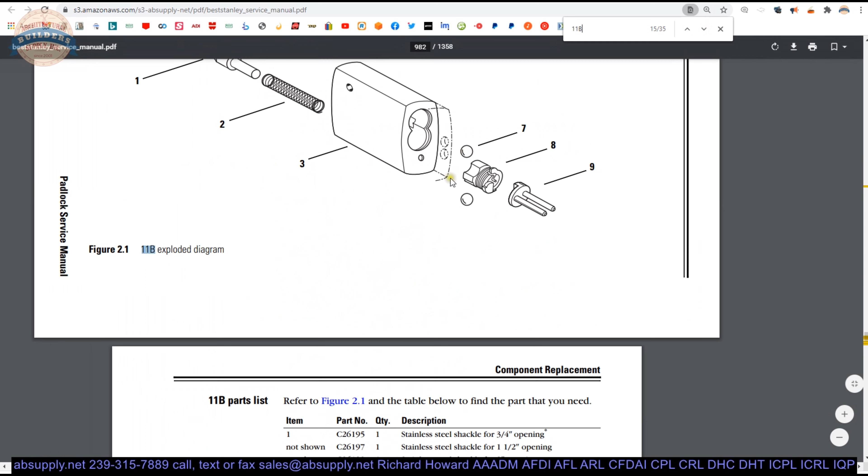Let's look for 11B and see what we come up with there. 11B padlock, okay, 11B exploded diagram. So let's continue to cycle through these matches. Here we go. All right, so that's what our 11B padlock looks like.

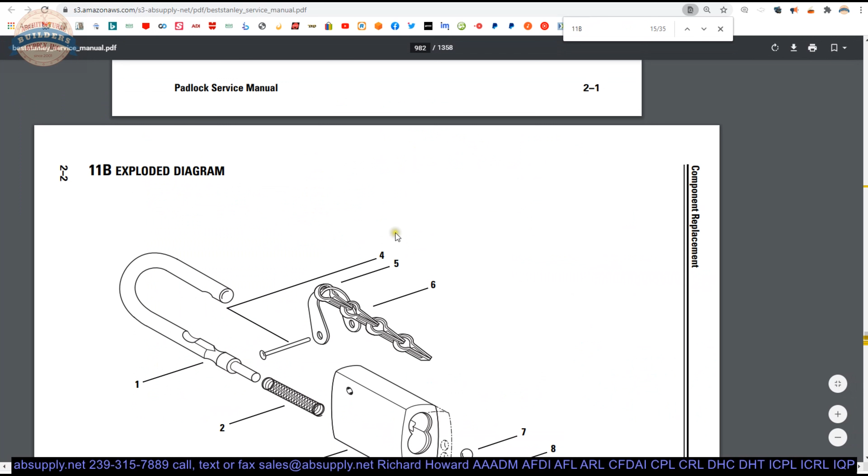Now, why is it an 11B? Well, the part number is 11B, so this is clearly a subcomponent of the 11B padlock. And here's our exploded diagram. So part number 1 is indeed our shackle.

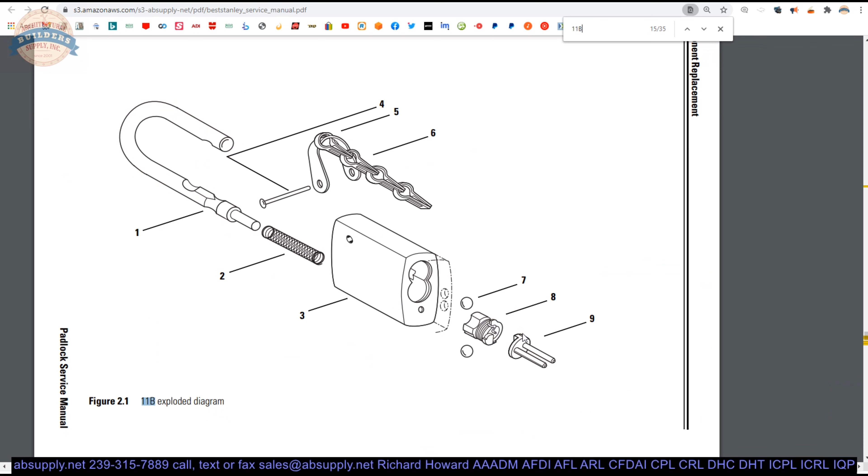A very simple mechanism - I've taken these apart, they work very well, they're easy. If you're going to service this material, you do need a tool for part number 8. And that part 8 is the locking cam assembly, and that tool is listed here somewhere.

Yeah, here it is, part 3, locking cam disassembly tool. There's a spring involved, and without the tool, it can be a challenge to get that to move - that's to be sure.

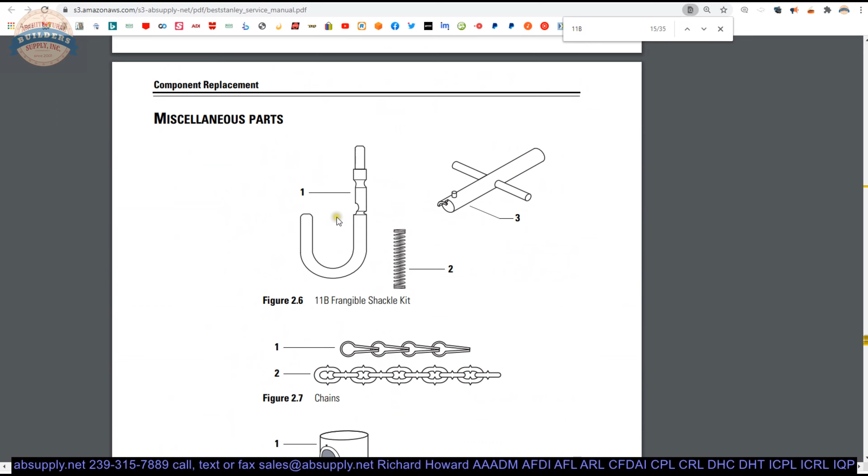Miscellaneous parts, part number 1, shackle. So they do make a frangible shackle kit. But if we get back up to our 11B padlock, part 1 - stainless steel shackle for 3/4 inch opening. Now they get down to, in part 1, frangible shackle for 1.5 inch opening. So that's clearly what we're dealing with here.

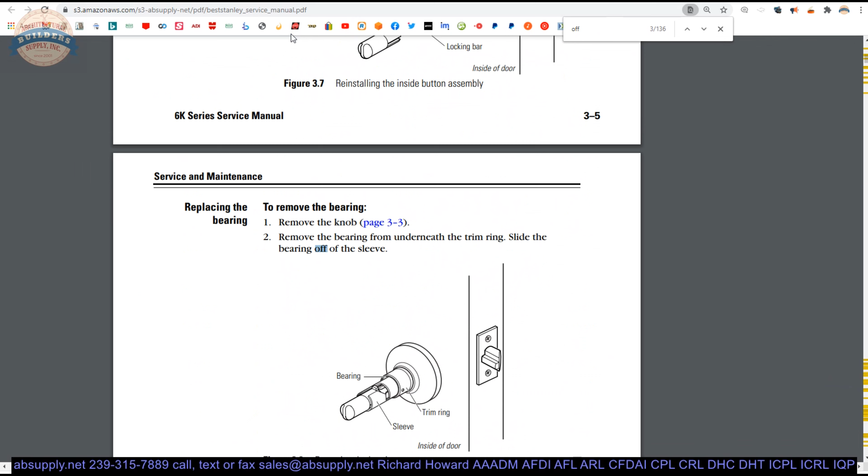Just searching through the document... okay, I don't know where they're coming up with that part number from, 11B2. We'll see if we can discover where that part comes from.

The point is, in the service manual, you're able to pull up these different series. If you have an 11B padlock, here are the components available. Scroll to the next page and there's the parts drawing. Once on this page, you can review all the other replacement parts for the different padlocks from Best, their different series.

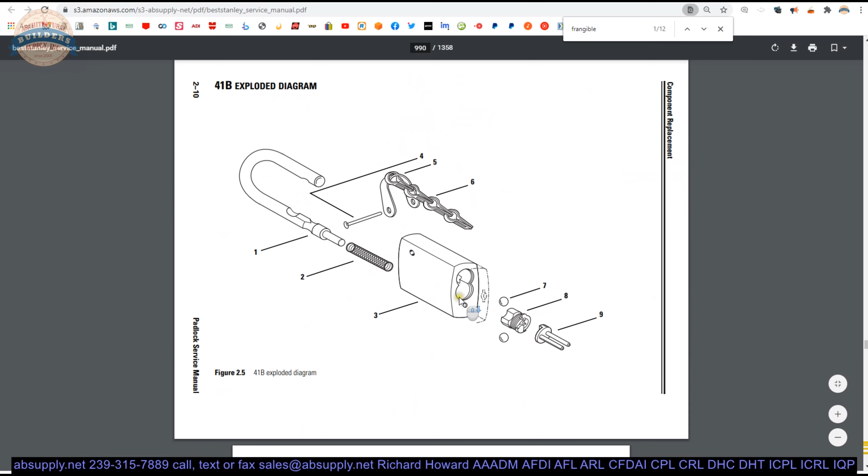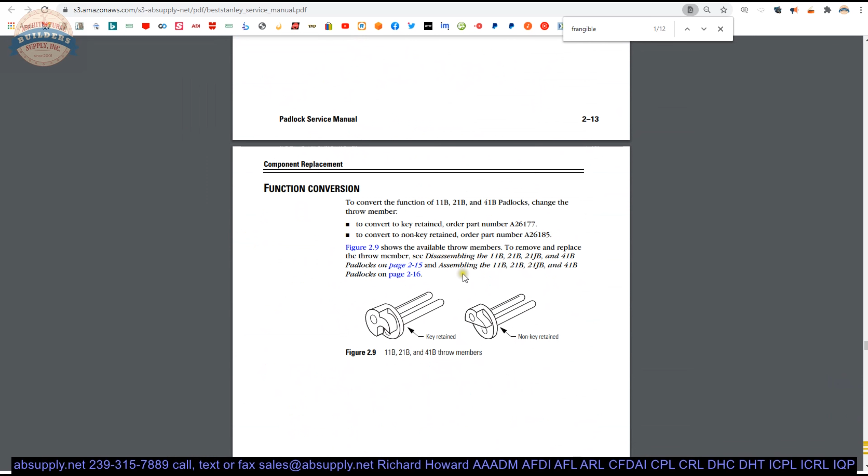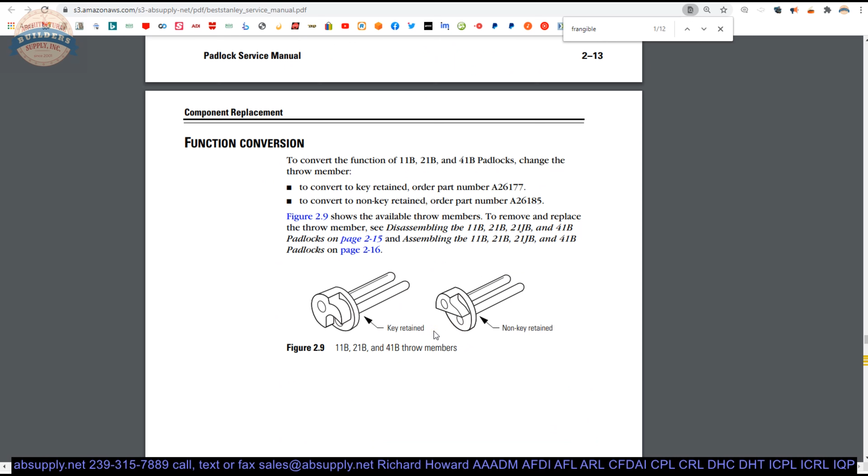Throw members - not uncommon to purchase these. The reason you'd purchase different throw members for padlocks is because the padlock you have will be non-key retaining, meaning you can remove the key when the padlock is either locked or unlocked. However, that might not serve the application best, and you want to be sure to remove the key only when the padlock has been relocked. Key retained throw member is what you would order in that case.

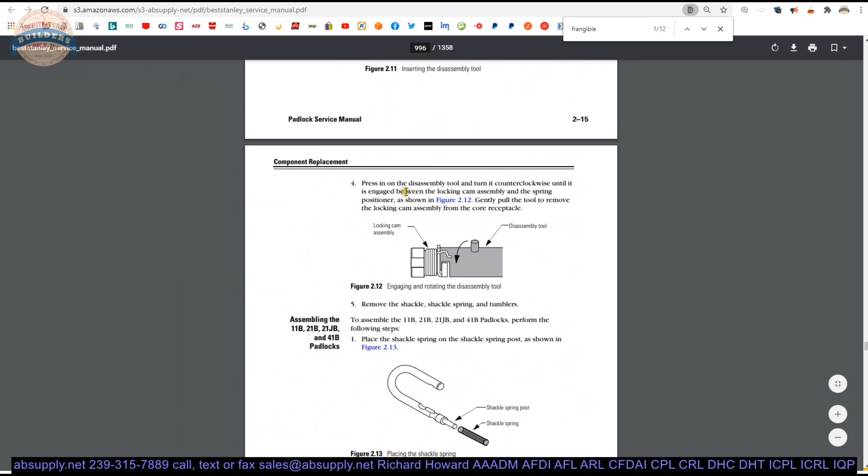Instructions on how to service the material are in this area as well, showing how the disassembly tool is used. I have gone through this when servicing the material. It takes a little getting used to in terms of working the disassembly tool, but as you can see from the exploded drawing, there's just not a lot of parts here.

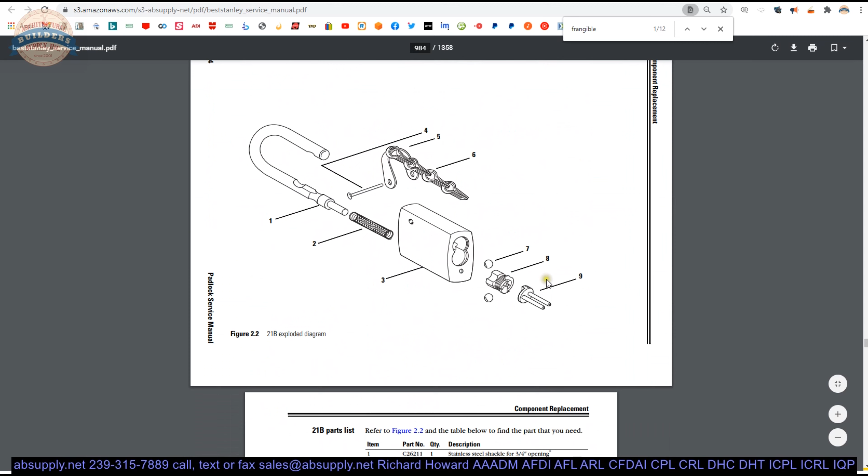That tool only works with removing and inserting your locking cam assembly. Now, still a mystery, this 11B2OFF.

What it sometimes boils down to is looking at the price list. Let's first look at the full product catalog, which is here. We'll do a find function on our keyboard for 11B2OFF - that doesn't give us anything either. Okay, it does, because I'm searching for the wrong term. It's 0FF, I can see that clearly now.

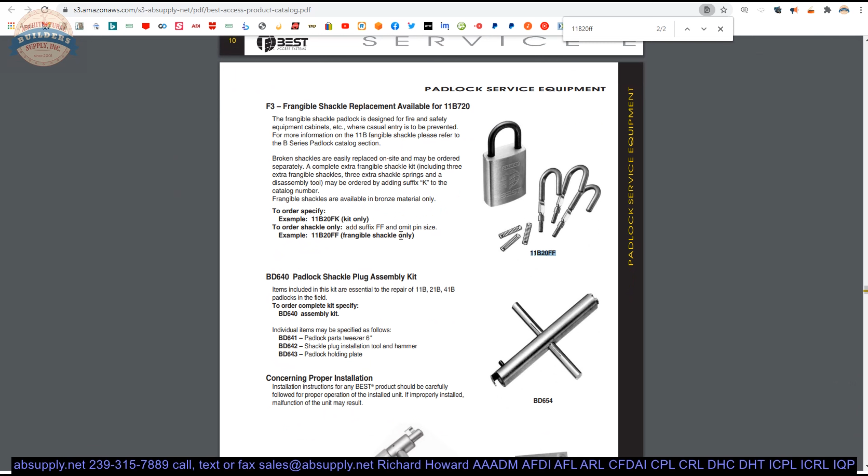This document is also linked down below. So it's 11B20FF - we're going to need to correct that character in our part number. However, the issue is that it's clearly a 0 in the cut sheet, but in the price list we've pulled up, it's clearly an O. So it's hard to say which it is. We'll leave it at O, since the price list, in my opinion, generally supersedes other published data.

It should be 2.0 in my opinion, because it's a reference to the size of the padlock, the shackle height. The shackle height we have is 1.5 inches, so it'd be a 2.0. So that's what that's going to be - it'd be an 11B20FF, and there's your frangible shackle only, shown here as well in the cut sheet.

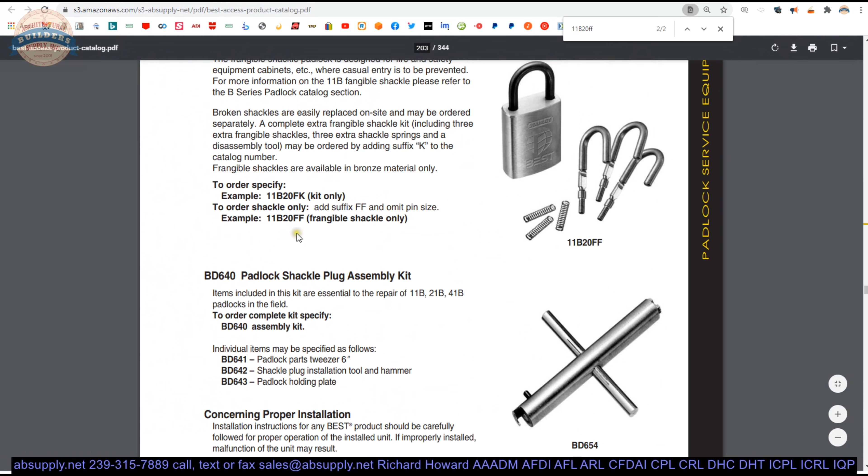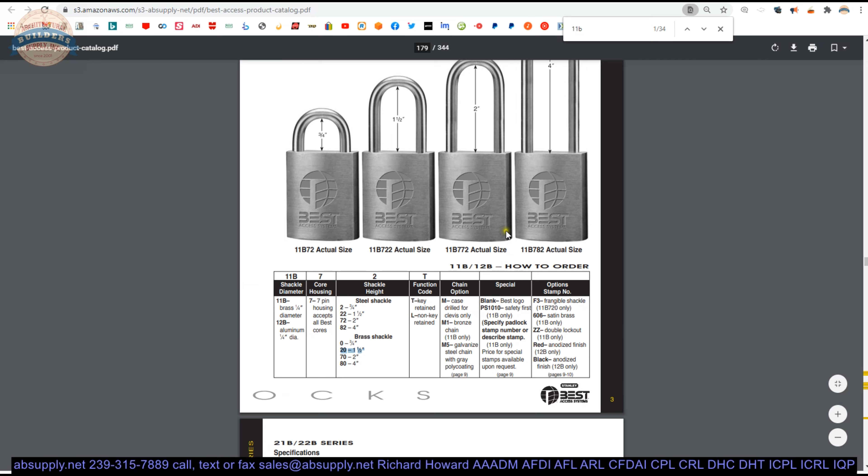Let's see if we can just find the padlock itself, which we can. We can pull up in the full-line catalog a linked product brochure down below, where you can scroll through and view all the padlocks available. Our 11B means it's a brass body - they do make aluminum as well - 7, and then your brass shackle, 20, because that's what we have here, a 20. Then whatever other parts of the part number you need to further detail your padlock requirements. The product brochure lets you simply look at all the padlock information from the manufacturer.

Back to our F3 option, frangible shackle kit. Now, on the manufacturer's page is where we keep all the encyclopedic documents - not just the service manual, but also the Best core and key service manual. I have a catalog on their E-Series mortise and rim cylinders, since it's very common to just sell Best mortise housings alone, cores by others. The A2 and A4 system training manual is here as well. If you're curious to learn how to pin a small format interchangeable core, this would be a bit esoteric, albeit required document to learn how to go about doing that.